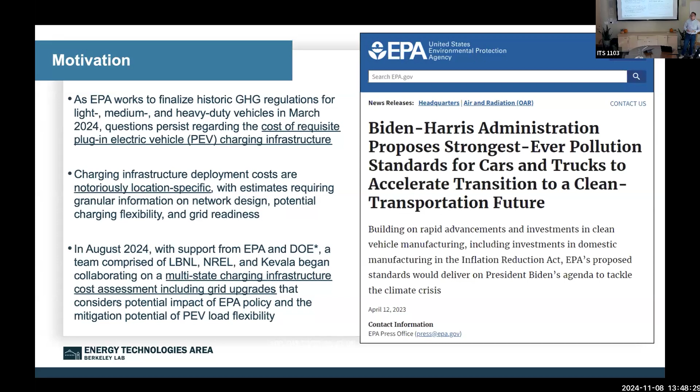For example, the notorious location-specific questions about infrastructure: where the chargers are needed, what type of chargers are needed at that particular location, will drive the cost problem quite differently. And what's the grid side requirements for integrating this amount of electric vehicles in the future? So that's why the capabilities within the DOE warehouse were assembled together to help this analysis.

How the study was set up is shown on this slide. We took the scenarios from EPA directly, including the action scenario and also the reference scenario or non-action scenario. The reference scenario aligns with a couple of existing statewide initiatives like Advanced Clean Truck in California and some other states endorsing the ACT at the national scale.

And also there are other concerns in the EPA adoption scenario when they create the action scenario, where it's a little bit more aggressive. For the heavy duty sector, the action scenario has more than doubled population of electric trucks in the study.

NREL and Berkeley Lab, using their tools, project the load shapes at regional and location specific levels, and the Kevala take these load shapes in a downstream analysis by mapping the load shapes on those specific circuits to the 5 selected states, including California, Oklahoma, Illinois, New York, and Pennsylvania.

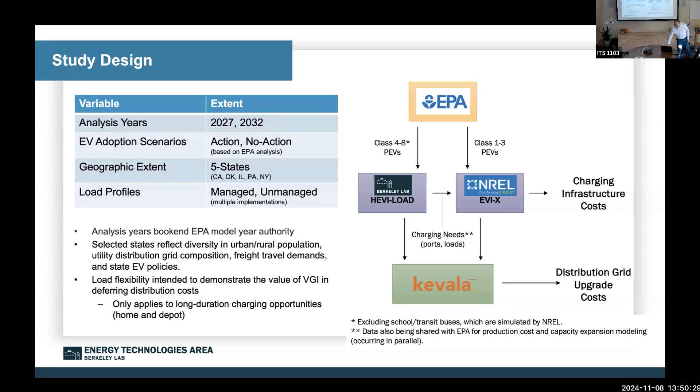However, even though the result was for 5 states, in terms of the transportation modeling, we have to cover the entire nation. As I can show later in the slides, the trips and routes are quite intertwined. If you are looking at one specific state, that may involve trips coming from other states that just stop by these particular states, creating en-route charging demand. So that's why we had a topic about national analysis.

How we're gonna do it is shown on this slide. This slide we made for the methodology, not only for the national study, but also for the CEC's AB 2127 study. Overall, the workflow starts from the left-hand side diagram here. I would say the most important input into the HEVI-LOAD model is the travel demand model. As you can see, those arcs connecting different points on the map.

Travel demand model is essentially a statistical model that tells us how many trips are coming from different locations as trip origins to other locations as trip destinations. It's a statistical distribution that matches the real world data we've seen from different telematics data sets. This travel demand model was calibrated with different real world location data in terms of starting time, trip distance, parking duration, etc., just to make sure that the synthesized universe we have resembles the real world.

And also, according to the different adoption scenarios, we have the zero emission vehicle stock, and the different types are mapped to different powertrain types, battery sizes, and other vehicle specifications. All this stuff harmonized serves as an input to the second part, which is the backbone of the HEVI-LOAD tool, which is agent-based simulation.

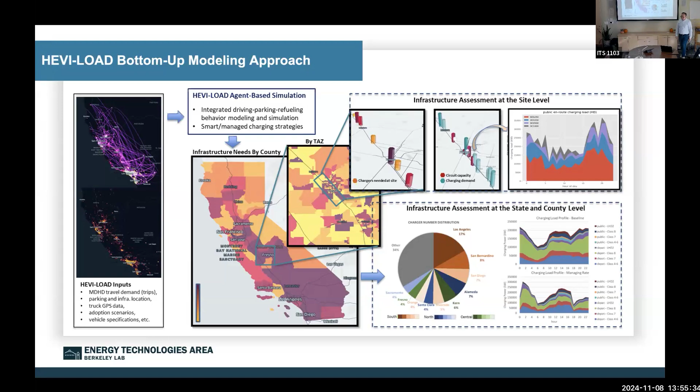Evolving from the statewide study to the national scale, as you can tell, the methodologies share similar backbones, but the travel demand model gets more complicated. There are a number of more data sets we took advantage of in the DOE space, as you can see, the NHTS truck OD data, freight analysis framework data, registration data, etc. All this data was fused in a way to inform the travel demand model.

As I mentioned earlier, the routes are quite intertwined for multiple states. For example, the green routes are the routes that start from New York State and go into New York State directly, but the red ones are those just passing by. So it's hard to focus on only one state for the results because there may be emissions and energy demand carried over from other parts of the demand from the trips.

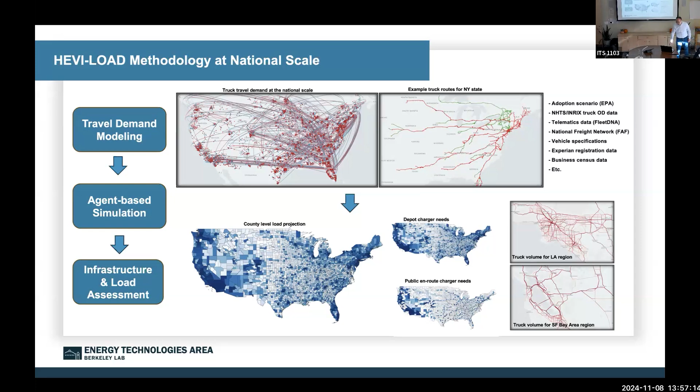We can talk more about the methodologies, but the output of the national study is the charging load projection at the county level. You can distinguish the result by the type of chargers, like depot chargers, public en-route chargers, etc. It's based on the different definition of the charger and also location.

Specifically, the truck OD data from INRIX was used as a sampling seed. As you can tell, on the map, there are origins and destinations which we can process as geographical distributions. And then a bunch of other data was used to augment this synthesis process. Eventually, it's a sampling process.

We draw trip OD samples out of the travel demand model and come back to compare with the given scenario from EPA, because the EPA scenario tells us the total energy demand at the state level by different vehicle segments. We want to make sure the sampled or synthesized trips share the same energy and travel statistics as the input scenario. And then at the trip level, Fleet DNA and other data sets are used to calibrate the trip starting time, parking duration, and travel distance.

After that, we try to calibrate another type of parameter, which is the behavior. Behavior is something mainly driven by assumptions, like if a truck drives out of the depot in the early morning, what's our guess of the starting charge? So we have to rely on some real-world truck deployment or testing data sets to keep track of their starting SOCs and use that as a starting point to calibrate the trips we synthesize.

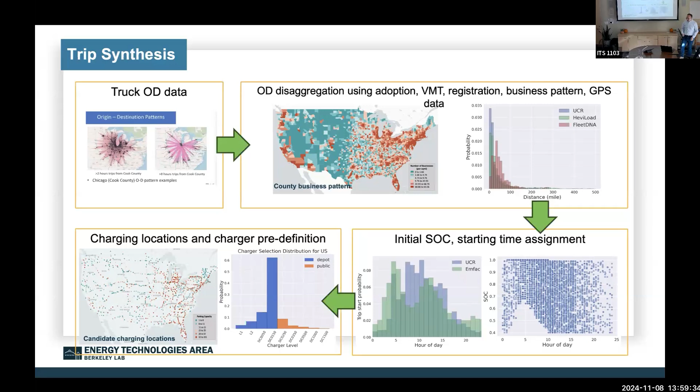And in terms of output, there are different types of output, as you can see. We can see the location level load shapes, or we can zoom into a particular location to see how the loads from different vehicle types or charger types stack up. And we can also evaluate the aggregated statistics, for example, in this particular case, the long haul tractors versus short

haul versus vocational. We can also see the simulated truck volume aggregated to the freight corridors that was used to harmonize with other freight corridor strategies to see if the same urban congested corridors can be prioritized from different data sets. The public and depot charging load can also be visualized to different geographical units depending on if it's a location specific study or census block level or county level.

So overall, it's quite flexible to tell us so many different things as we try to make this whole platform as a fancy calculator where you can turn different kinds of knobs to drive to different results as output. But more importantly, we want to build some sensitivity analysis pipeline so that you understand the impact or change of one particular result with respect to certain key parameters for the knobs being turned under the hood.

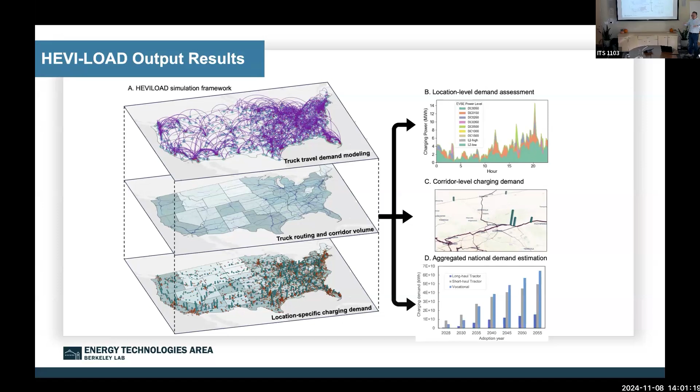So overall, this high level methodology overview, particularly here, as Lou mentioned, there are a couple vehicle types in the data set we extracted. Each one has quite different start time distribution and end time distribution. So it sort of resonates with the argument that the medium heavy duty space is really complex and has so many heterogeneous behavioral patterns. A statistical approach is what we took to accommodate different vehicle behaviors and duty cycles in the simulation.

We believe so far it has a good coverage of the vehicle types, but it's a very challenging task to cover 100% of the types of duty cycles so far. So far, the effort is really trying to push to the last mile of this modeling practice. What's the difference between the left side and the right side? The left side is the distribution of start time and end time, and the right side is the trip duration. How long the trip is from when the trip starts to when the trip ends, and also when the vehicle is parking there, how long the duration usually is, labeled as trip intervals.

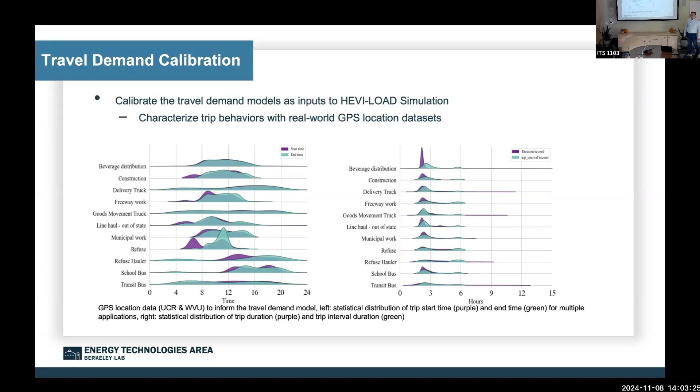One particular knob in the simulation is how we treated the location types. We assume the starting location and ending location of trips are the depot locations, where the trips will most likely charge before the trip or after the trip is finished. But the second type of location, besides the depots, are the public locations. In this study particularly, we focus on the public en-route location. Suppose a truck is just running on a road segment and realizes the battery is dropping low, below like 30%, for example, that triggers range anxiety.

The truck drivers start scanning in the direction of their originally planned routes, wondering what is the best location to stop by and charge, right? So here, how the best should be defined is a research question, but here we choose the total distance as a metric for the decision criteria. That means the truck trip at this particular moment will be broken into two parts, from the current location to the selected charger, and then from the selected charger to the original destination.

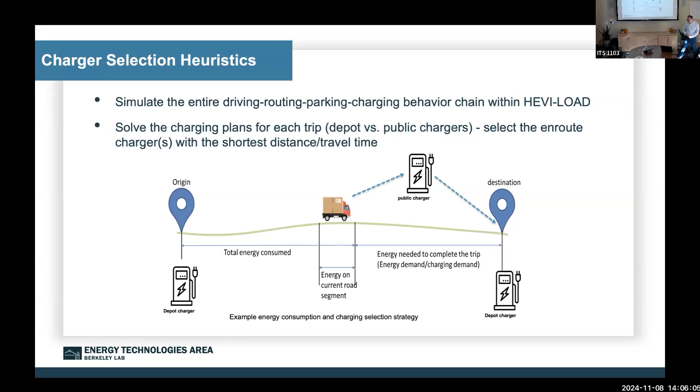Okay, great. And then there are some load shape results, which are required by a lot of utility industries. For example, what's the load growth in my territory in terms of the peak power or the total energy demand per day? So as you can tell, given the EPA scenario, we have the 2030 to 2040 load growth. And in the vertical direction, we can also see the load shapes from national scale and then zoom into the state level and then zoom into a particular county.

One interesting question, if you notice, is that we have a little peak for the national load shape around 9 p.m. or so. That was an interesting point for us to investigate a couple months ago, why there is a tilting point. But then we realized the United States has a really large geographical scale. The charging load from New York on the East Coast has quite different load shapes than that in California. So aggregated together, we'll see that type of bell shape around 9 p.m.

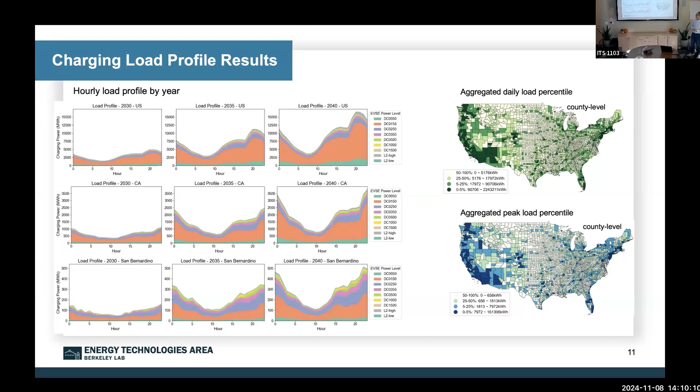The other interesting issue is that for the California counties on the West Coast, the geospatial scale is really large. That makes it hard to compare from the density perspective. But in aggregate, some counties like San Bernardino County, Los Angeles County, right? They showed really huge aggregated energy demand. But if you zoom into a specific census block level, that may not be the case. So that's one issue we are trying to solve using even more granular geographical units like a census block instead of counties. Yeah.

This plot shows pretty much the same thing as the previous one, but in terms of the vehicle types instead of the charging power. You can see the relatively heavy-duty Class 8 short-haul trucks consume a significant amount of energy within all sectors, which is the orange part in the higher level visualization. And the long-haul application, Class 8 long-haul, shown in blue, shows relatively stable load shapes with the peaks and valleys closer than other segments. However, there are still higher levels in the early morning versus during the night. That was because the trip starting times we have seen in the real world database showed us a lot of trips starting early.

Looks like you're getting a lot more charge demand from short haul than long haul. Yep. Interesting. Because in the diesel world, long haul demands a lot more energy than short haul. Yeah, short haul was defined with an operation radius of 250 miles. So they serve more the regional business needs rather than long-haul freight transportation. Are there different rates of electrification for those two kinds of trucks? Like, is there a higher rate for the short haul? Yeah. Okay.

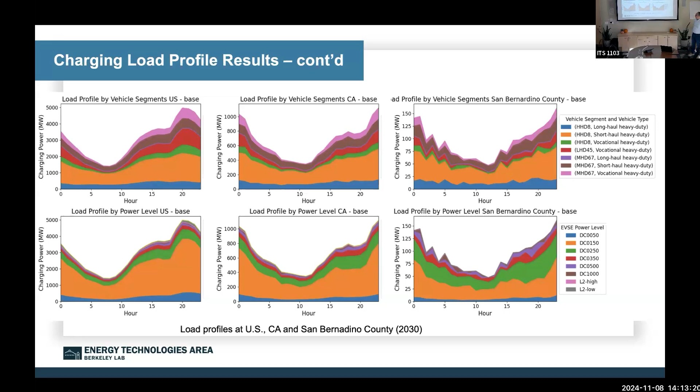And this slide shows some sensitivity analysis. As I mentioned earlier, if we assume the SOCs in the truck's battery resemble the real-world data we are seeing today, we labeled it as the base case, and we generate the charging load shapes for the public versus depot. However, if this SOC distribution changes a little bit in different directions, we want to know how this will impact the load shapes and also the percentage between the public charging versus the private charging.

So we did two additional cases. One is a high case. High case means that we increase the SOC distributions to the high end. For example, if the previous average SOC value is 80%, now it's getting to 90%. That means vehicles have more energy in the battery to start the daily job. And we find in this case, originally we have seen some charging load here, but now it gets shifted to later into the night. And particularly this is for the orange one. Orange one is the public charging.

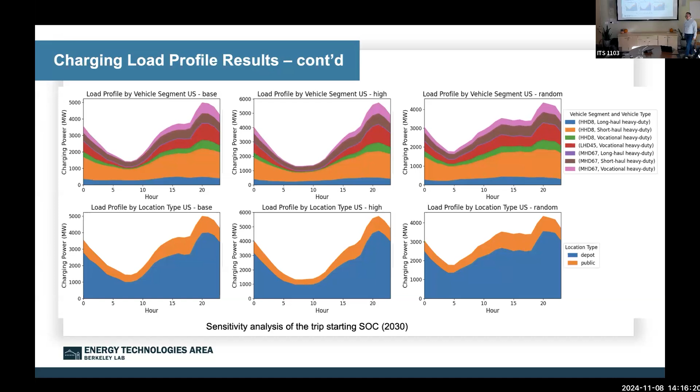The third case is that we totally randomize the starting SOC, with an average of 50%. So you can see the charging demand on the public side is significantly boosted. That's one case of the sensitivity analysis.

The other one, at the location level, at first glance is very chaotic, right? As we supply multiple types of chargers to this location, ranging from L2 to DC, 1.5 megawatt charging stations. 1.5 megawatt as the maximal charging power is the base case in this sensitivity analysis. We want to see what the load shape looks like if we increase 1.5 to 3 or reduce 1.5 to 500 kilowatts. So that's the base case, a high case, and a low case correspondingly. For the low case, of course, you see fewer needles per location, and even though the total energy amount equals the other two, the site-level peak load is reduced.

But if you look at the high case versus the base case, surprisingly, the needles do not overlap with each other to a much higher value, right? Our expectation is that if you have multiple megawatt charging stations at a location, you're going to see a much higher location-level load. However, it's not the case, because we realized those charging sessions are very likely to have a mismatch of starting time. They will not stack up with each other very easily.

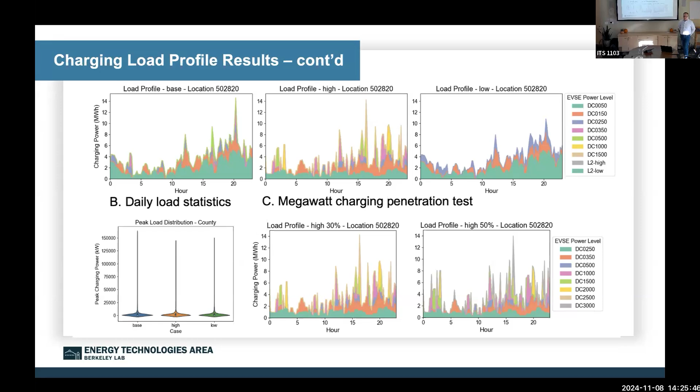Okay, hydrogen. I'm gonna go a little bit faster, because this is very preliminary and we're still trying to finalize it. In the EPA project, we also mapped their hydrogen fuel cell adoption scenario into the HEVI-LOAD simulation. But the assumption is quite different from the battery electric vehicles, without assuming depot charging, because we assume it's hard for every fleet to install hydrogen refueling dispensers in their backyard. So public en-route charging at nearby truck stops is the dominant location type.

So you can see the simulated refueling demand aggregated to those truck stop locations, as shown on this animation. There's some demand showing up on the East Coast in the early morning, and you can see those dots, proportional to the charging demand at each location, and then shifted to the West Coast.

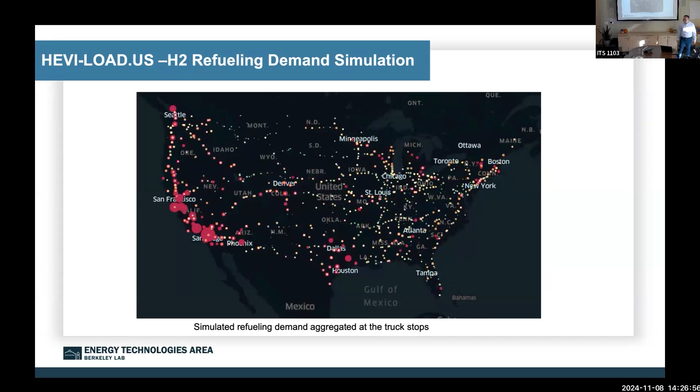Is the size of the dot the size of the station? Size of the demand. It's not necessarily the number or type of stations yet. We just try to aggregate the demand. Okay.

As we develop more functionalities within HEVI-LOAD, here are some key directions for discussion. One direction is to extend the vehicle travel from trip-based to tour-based. In the national scale simulation, we are using each individual trip to represent a vehicle, which is a caveat as well. Right now, we're using more granular telematic data from INRIX to keep track of every vehicle's behavior. One vehicle can have multiple trips over multiple days, making it more realistic, but also more challenging to design the charging infrastructure and the charging decisions.

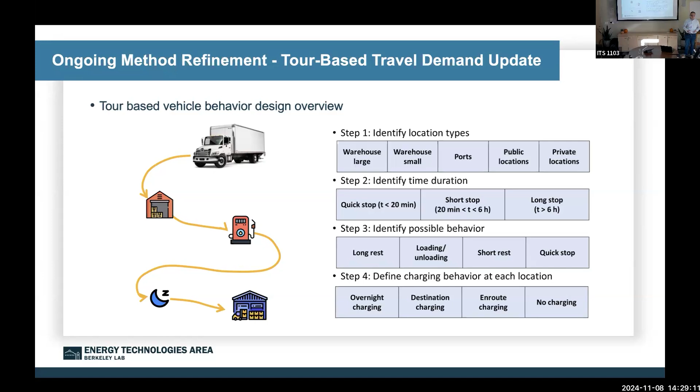The other thing we are actively developing is a managed charging strategy. We have a very heuristic method in the TI study, heuristically reducing the power for the selected depot charging sessions, right? You can see the red curve has lower peaks, but it's still not very effective. And then we have this optimization-based approach, assuming every charging session is controllable. So we can see the green curves. For the green curves, you can achieve a very flat load curve in these cases. So this is an ongoing process, and there's a lot of interest from many agencies for us to dig into this. So still early, but we'll have more to share with folks.

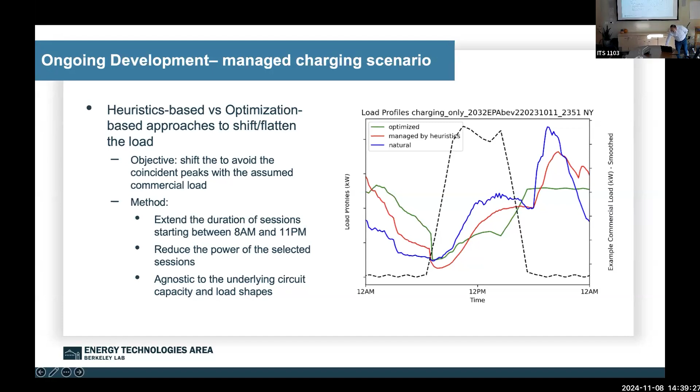There are also locations dedicated to certain fleets, and they align with the warehouse data, and they align with some fleet survey data. So we label those locations as depot locations. It's a lot of work.